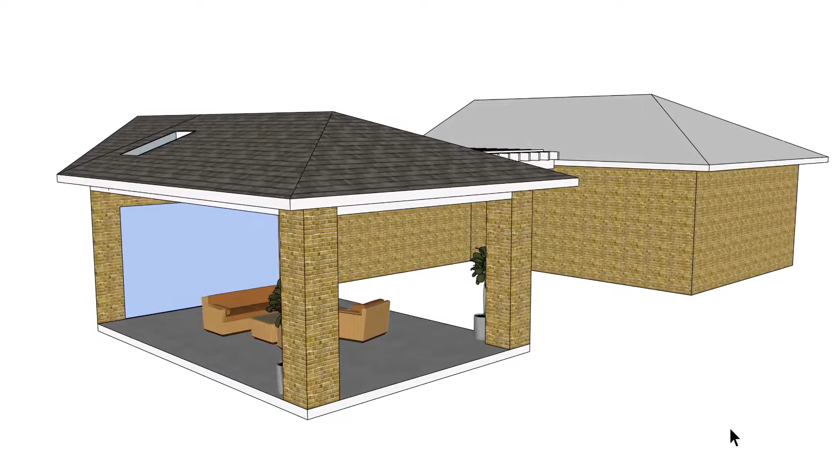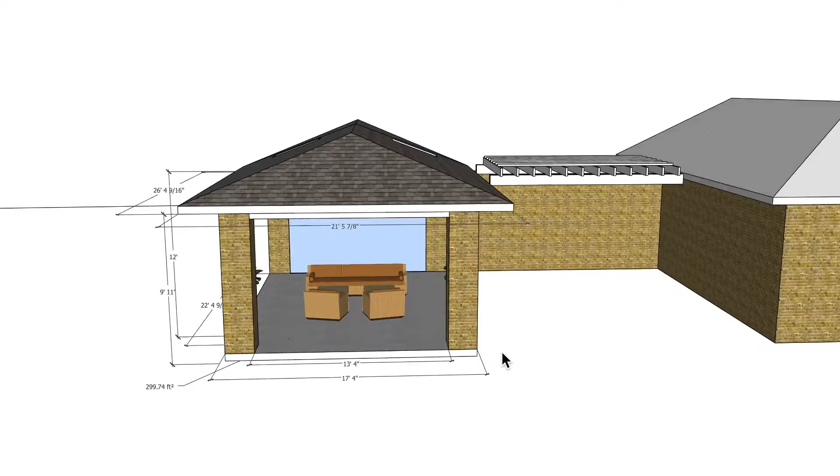Now let's get heating. Alright, so here we have this residential application, and let's just jump right into the dimensional part of the drawing here. So basically I have this, I'm going to call it a 13 by 22 and a half roughly, and you can see here there's a roofing section that goes a little bit wider than that, so that's 26 and a half roughly by about 22 and a half.

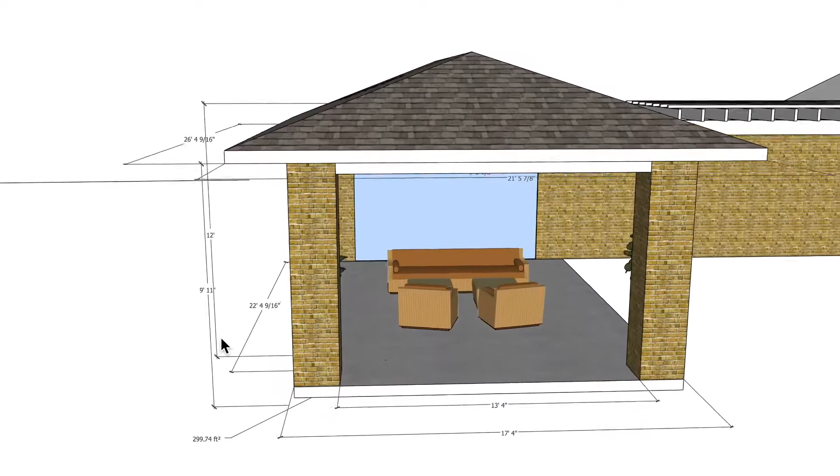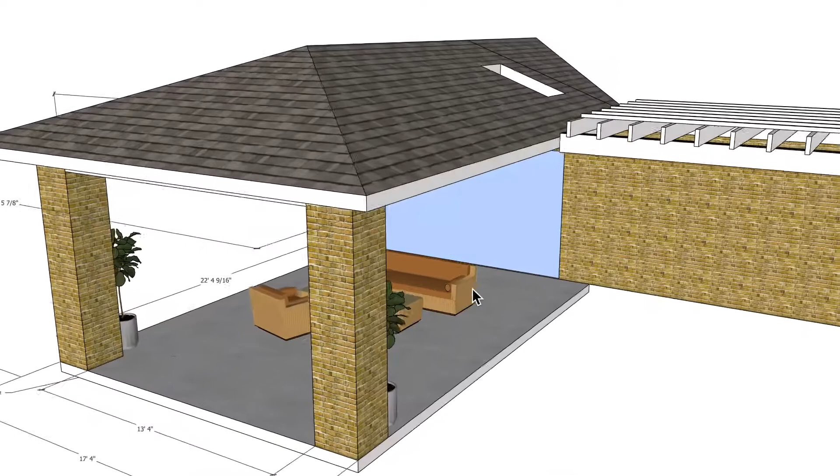And then also we have a couple different heights here. The eaves I have at 9 feet, and the ceiling height up here I have at 12 feet off the floor. And let's see if there's anything else that we need to talk about. I think that's about it. If I was to draw a square from this edge here all the way to this edge here, we'd come out with about 300 square feet of space, and it's a little bit larger with the overall space here, obviously. And so that's kind of like the calculation I would start out with.

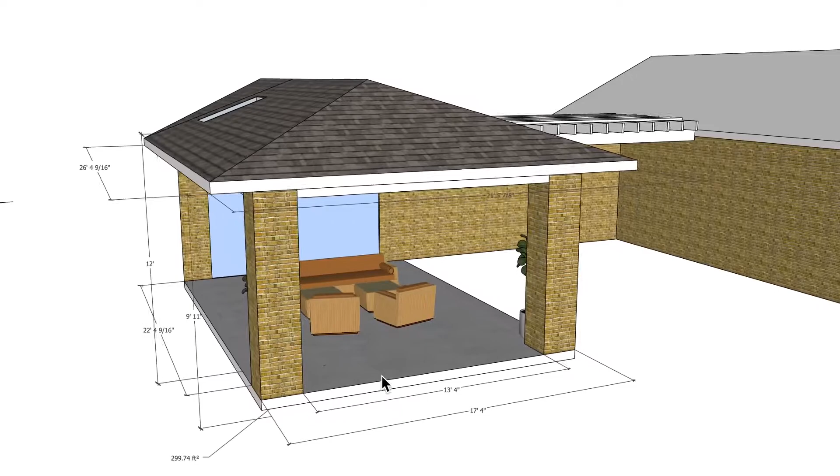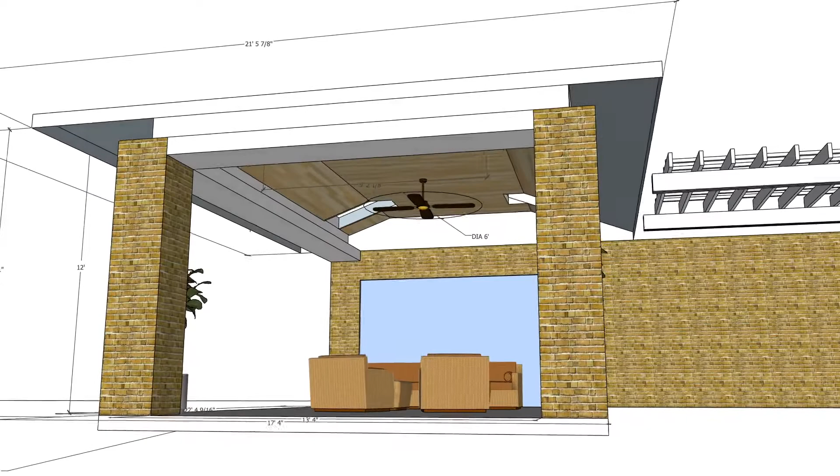And then also we have this 6-foot diameter fan. The round circle up here will represent the actual dimension of the 6-foot diameter. So we do have a fan in the center of the room, and I have it at roughly about 2 feet down from the ceiling. All right, let me turn that off again.

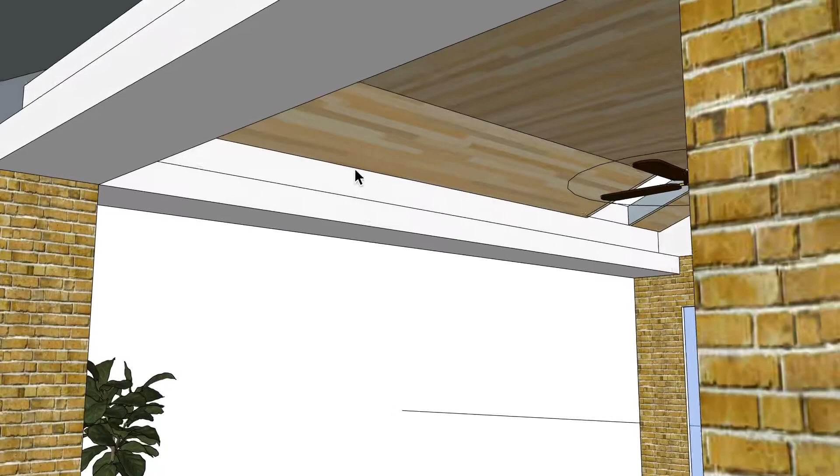Now, the original plan was to place the units within this area here and this area here and have them flush mounted. And because it's at an angle, that's not legal within the manufacturer's recommendations, so that won't be something that's doable. And it's not so much that you can't place the heater at the angle of this, it's just that you can't flush mount it.

And because of the flush mounting aspect of it, the ventilation will not allow the flush mount kit to properly ventilate, or I should say the configuration won't allow it to properly ventilate, and therefore it would tend to overheat within that type of application. So that's why it has to be placed on a flat ceiling surface in order to allow it to properly ventilate. All right, so we could put a couple of heaters there, however.

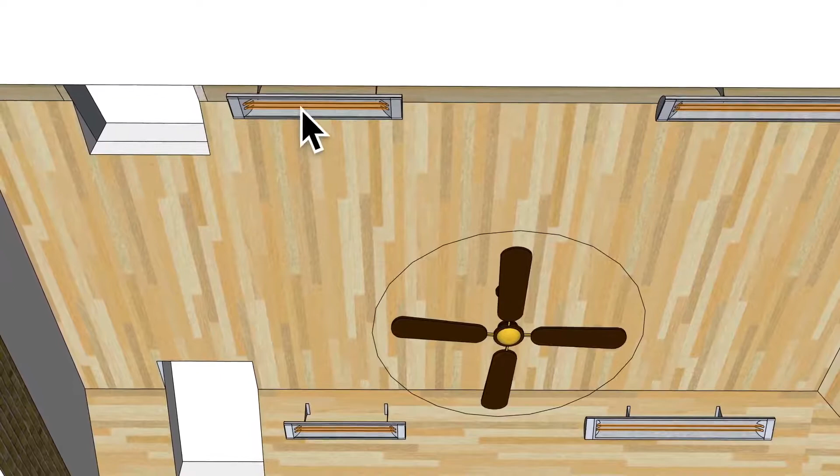And oops, sorry, I see I made a mistake here, but what I've done here is I've taken 2 of the 6,000 watt units, so I have one here and then one up here, and then 2 of the 4,000s, and you might want to even consider 5,000 watt units, just because I'm not seeing that the footprint of heat is powerful enough for this height. But in any case, so you could take 2 units here, 2 units there.

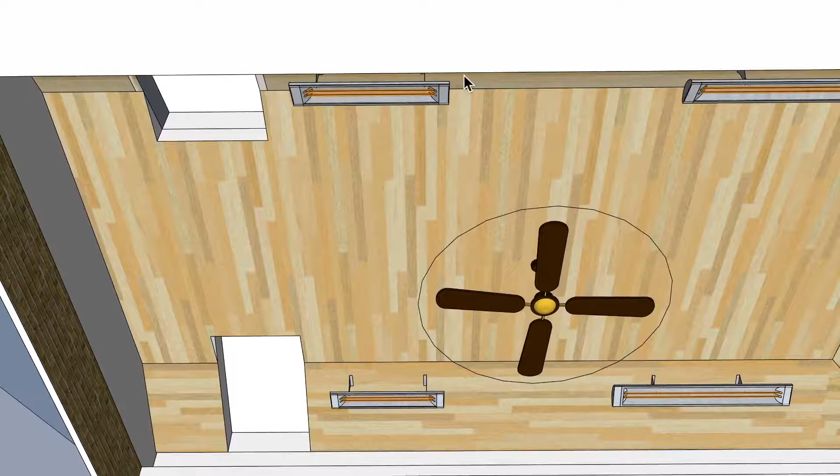Now I've used the shorter one because we do have skylights up here, and we also have to meet the clearances to combustibles. And let me just show you that. And so the clearances to combustibles, the one consideration I have is not only to the back edge of this area here, but also to the fan blades themselves. And you can see with this application here, you'd be meeting all that data there. Of course, I don't have this one set up right, so I apologize for that.

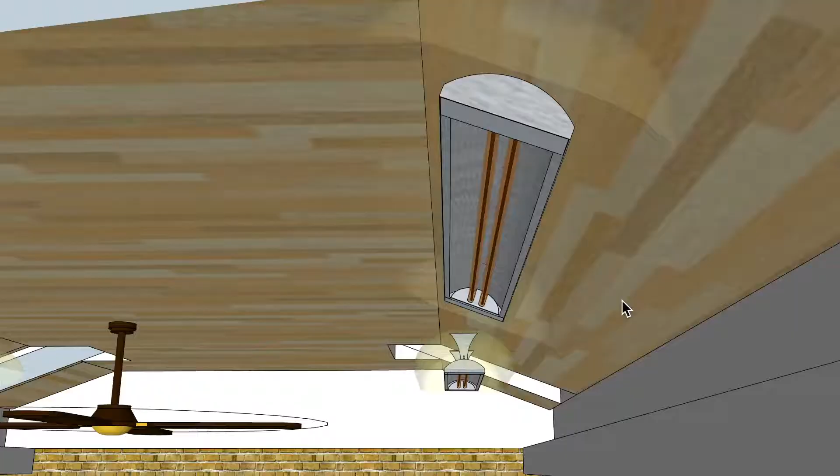All right, so let's go ahead and look at the footprint of heat. And well, let's go first of all back to the clearances above the heater. So with the OEM bracket attached to the ceiling like this, we would be meeting the clearances all above, and then of course below the soffit here as well. When it's at this angle, you can see if this one's pointed straight down, I'm not quite meeting that clearance, so it needs to be at the same angle of the ceiling that I have here, and that would work out just fine as far as the mounting of it goes.

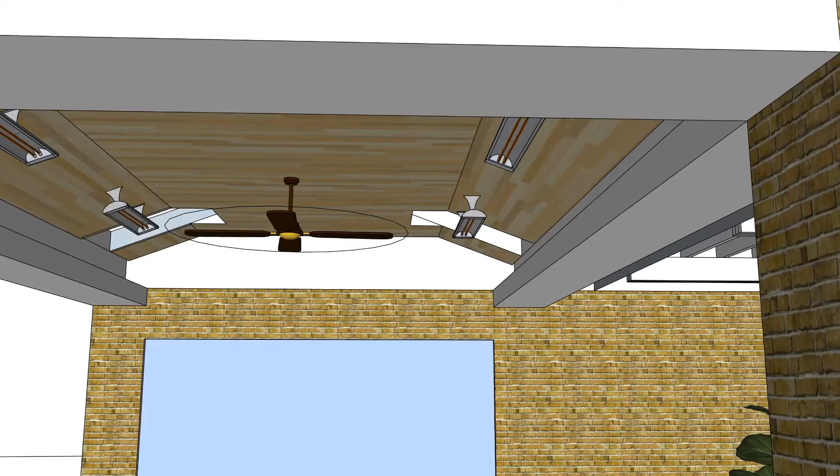And let's go ahead and look at the footprint of heat. So footprint of heat, you can see here that with the units angled in, we're getting pretty good coverage here. I would say that in a very cold climate like this, during the winter times, this would be a very well heated area in the center.

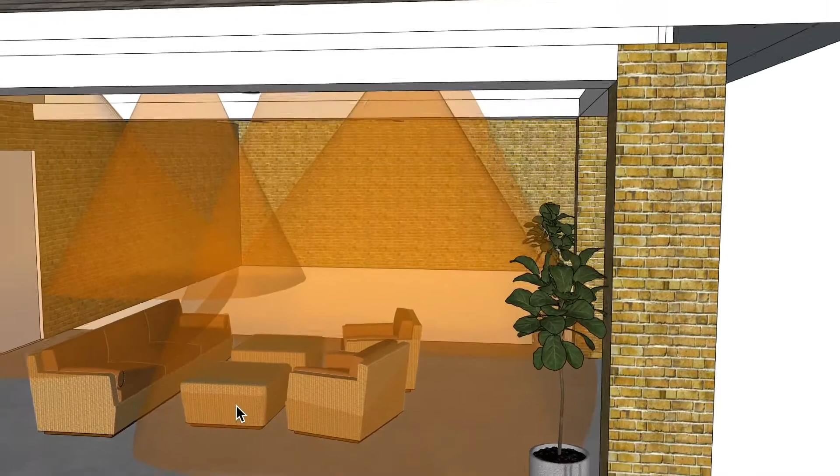Out here, you're not getting as much heat, but I'm really trying to concentrate the amount of heat into the center. I just think that with the fan here, that's probably how they might be, even a table, a dining table here, or something of that nature. But that would probably be how the setup would look.

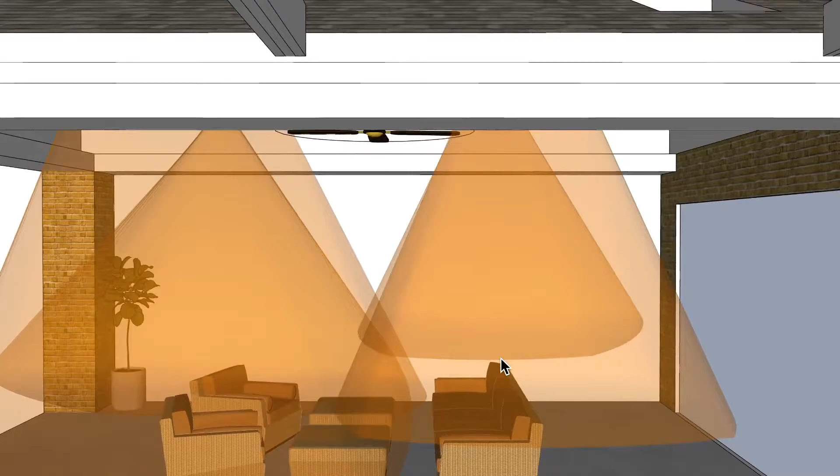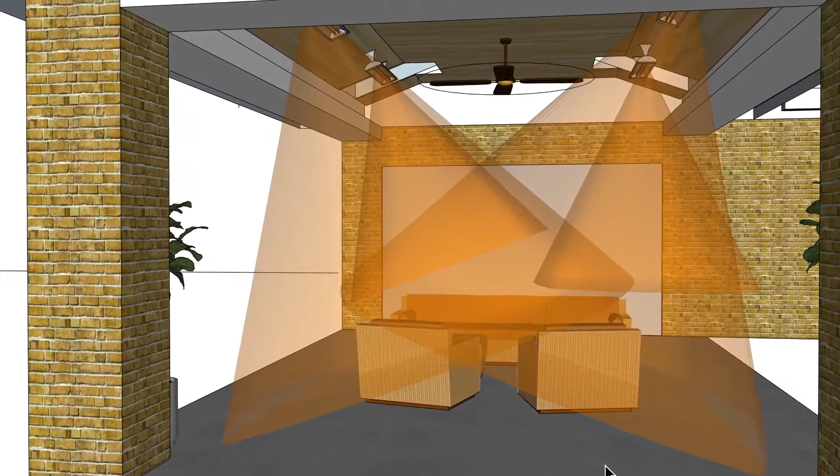Also, if these were 5,000 watt units, then the amount of heat that comes down here would be probably a foot lower than it is right now. So when I say heat, it's infrared heat, light waves. They're infrared light waves, so the light waves do travel and they penetrate all the way down until they absorb into any type of mass: the floors, tables, chairs, human body. So you do want a nice intense amount of that in order to feel comfortable. So that's why I'm choosing these models here.

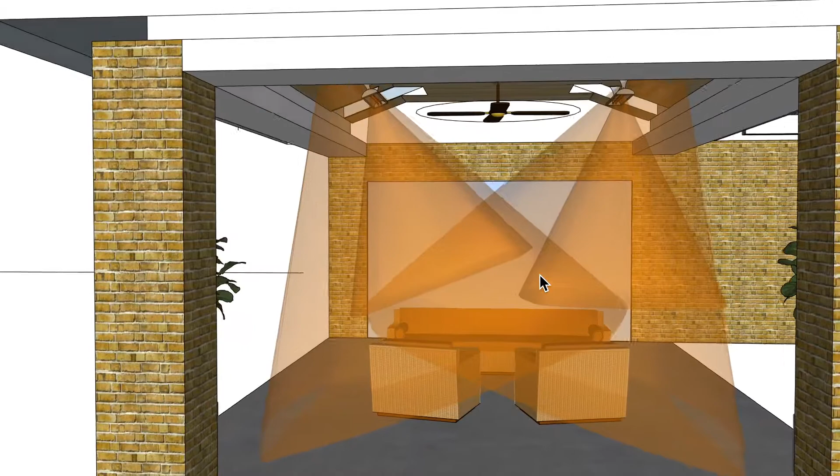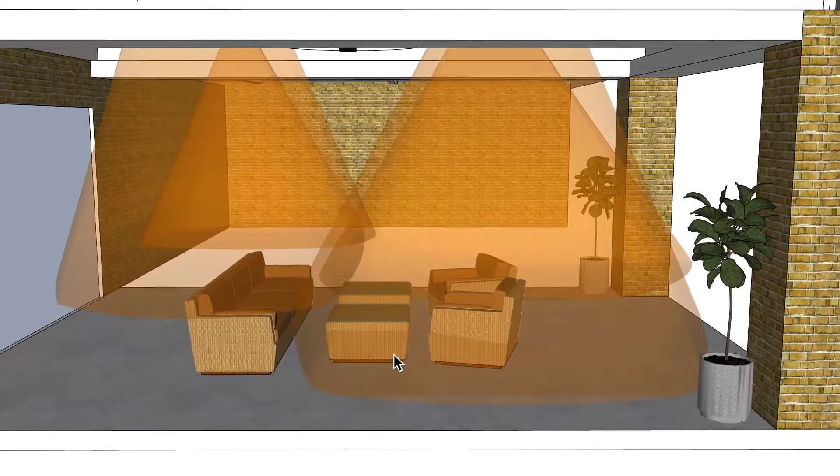Now, if you were to consider the amount of amperage you have available, and that does not meet the requirement that you're looking for, then you probably just want to do 2 of the 6,000 watt units, and then maneuver the seating appropriately throughout the season. Because this is a residential application, you obviously have that choice.

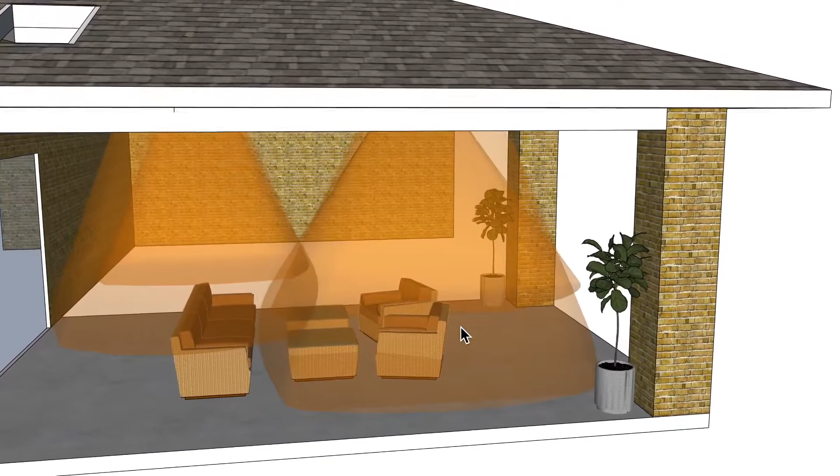If this was a commercial application and you had dining tables throughout a patio of a restaurant, let's say, then it's really hard to maneuver that stuff around. So for this application, you could do 2 of the 6,000 watt units and then just move the tables a little bit closer to each other. All right, so that would be one option there. And let's go ahead and turn that off right now, and we'll go with a different option.

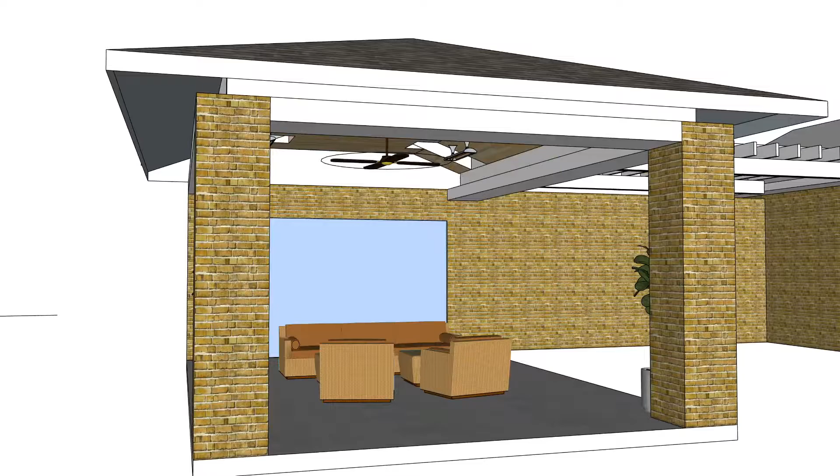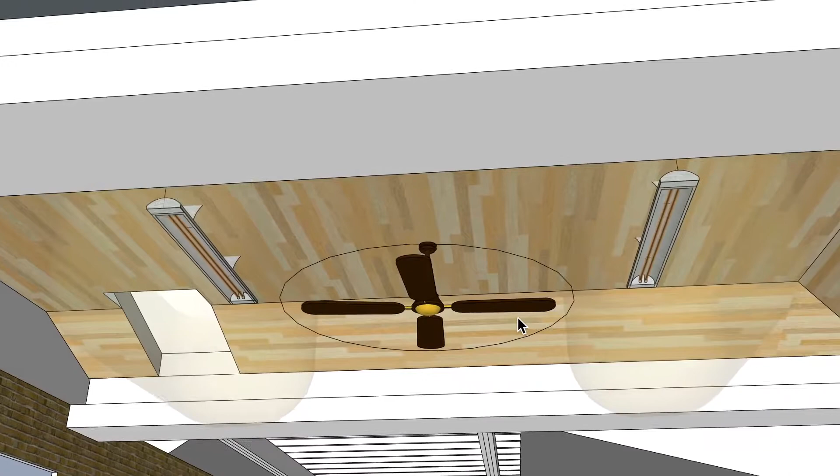This option here would be to surface mount, again, 2 of the 6,000 watt units. These are 6,000 watt, 240 volt, 25 amps a piece. And what I have here is I have them set up so that they are 18 inches from the edge of the fan. Now, I just went off the plan. The plan shows something that's roughly 6 feet in diameter, so it could be, let's say, 4 feet or maybe 5 feet in diameter, and so you would gain a few inches on either side, 6 and 6 if it's 5, and then of course 12 inches on each side if it was 4.

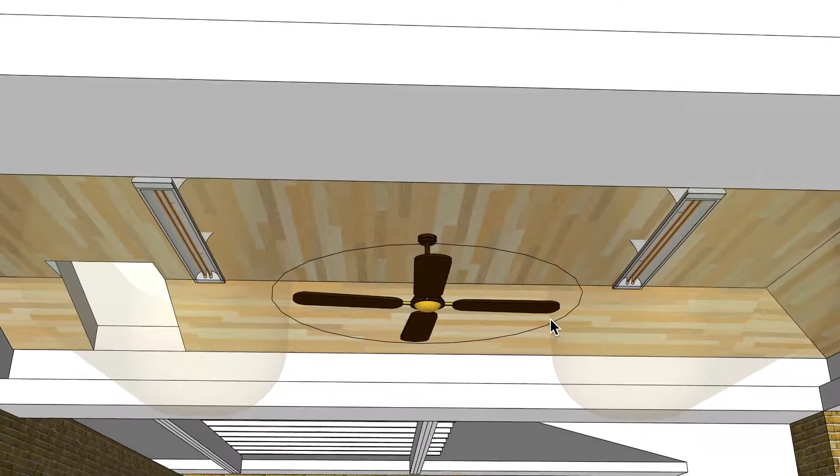So in any case, the clearances around the heater, you can see here there's no problem meeting that, and that's true with regards to the slope down here, which is what I'm really trying to show. So there's no problem with that. And I just have these heaters centered within this space. And just go ahead and look at the footprint of heat. So footprint of heat, again, 6,000 watts.

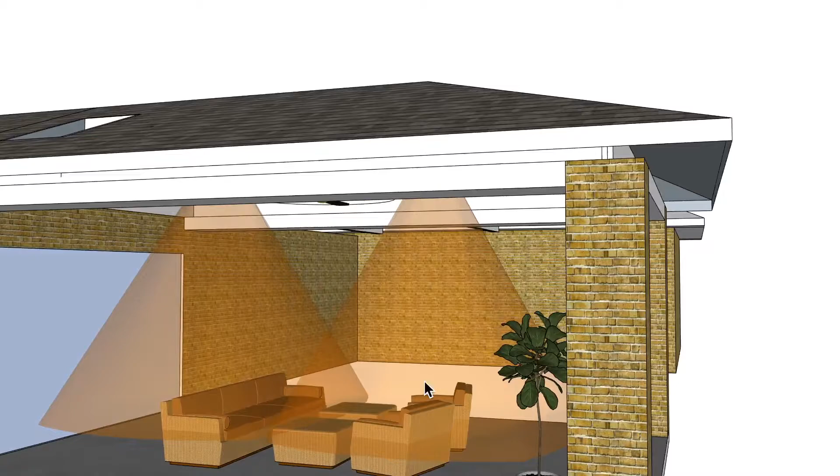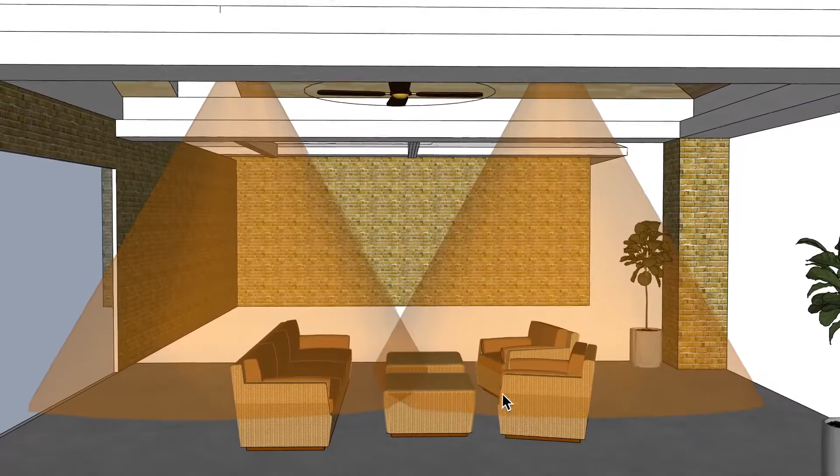Now, I know this particular consumer would like to have these flush mount, but because they're surface mount, they're about 9 inches lower. And I prefer that personally because I'm getting a little bit more intense heat down here, and especially because of the colder climate, I would probably prefer that. Now, visually speaking, the flush mount is going to give you just a little bit less intensity down here. So let me just go ahead and show that real quick here.

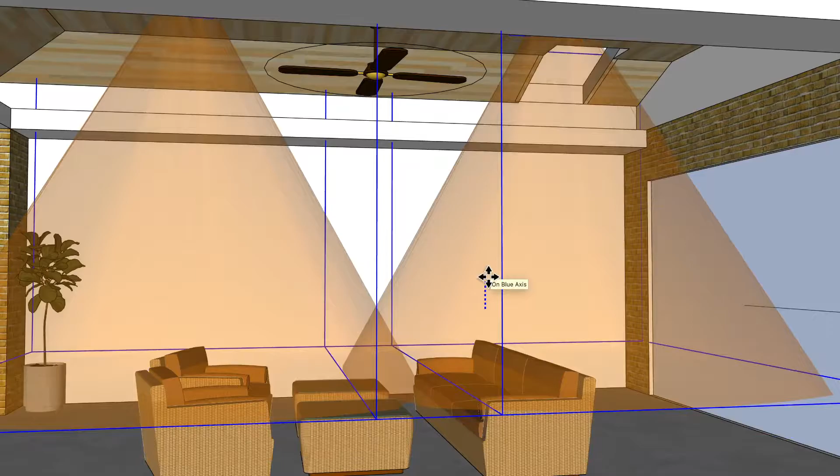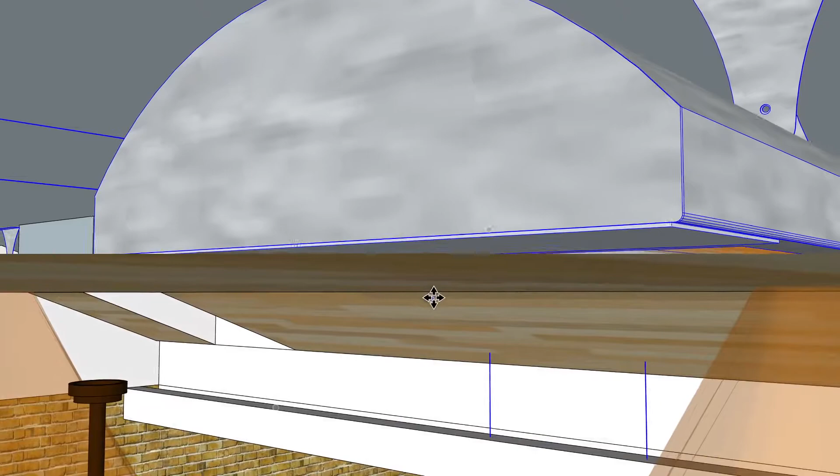I'm going to just go ahead and move these up 6 inches, or sorry, 9. It's actually 9.5 inches roughly. So let's go 9. So that would be close to, let's see if I'm there. Let's just do it right like this. Sorry for the delay. All right, so that would be the surface of the ceiling there.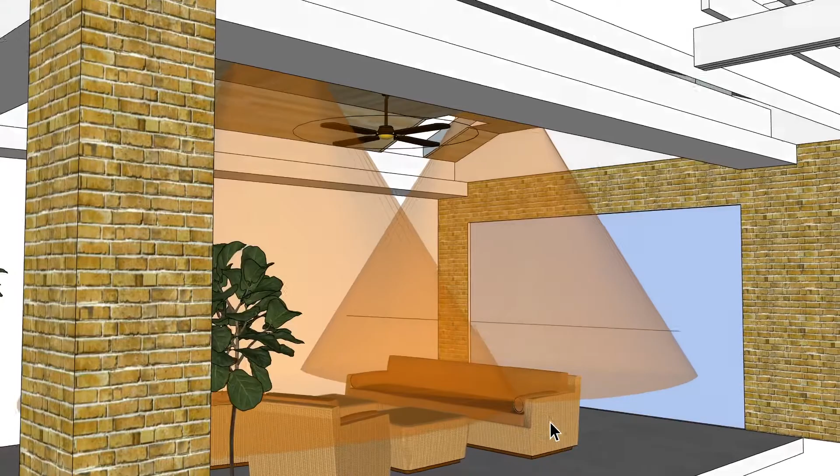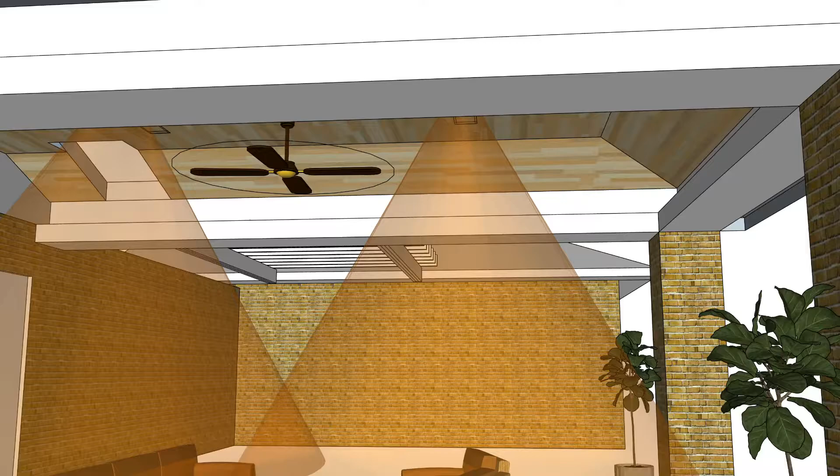And of course you have to use the flush mount kit and 1 hour fire rated drywall inside of that cavity. But you can see here now our intensity isn't quite as high as I'd like it to be, and so therefore I'm not excited about this, but it would work for some of the season. So something to consider. But it would also make the property look much better, so I do agree with that. And of course, you still need to meet that clearance on the 18-inch edge there.

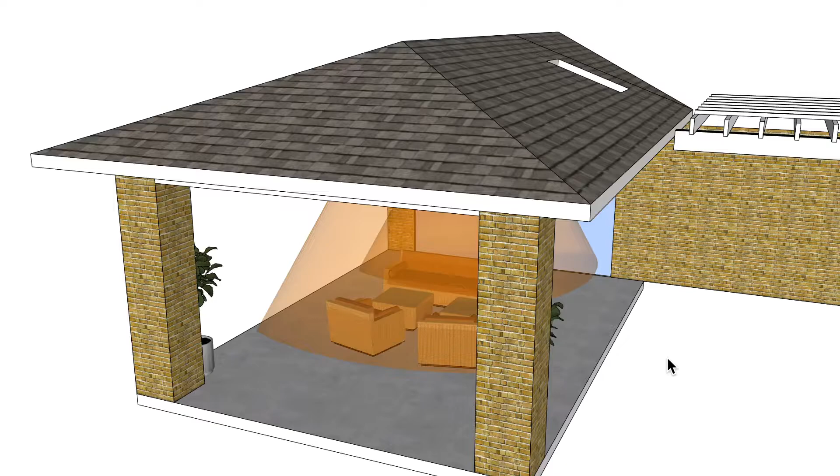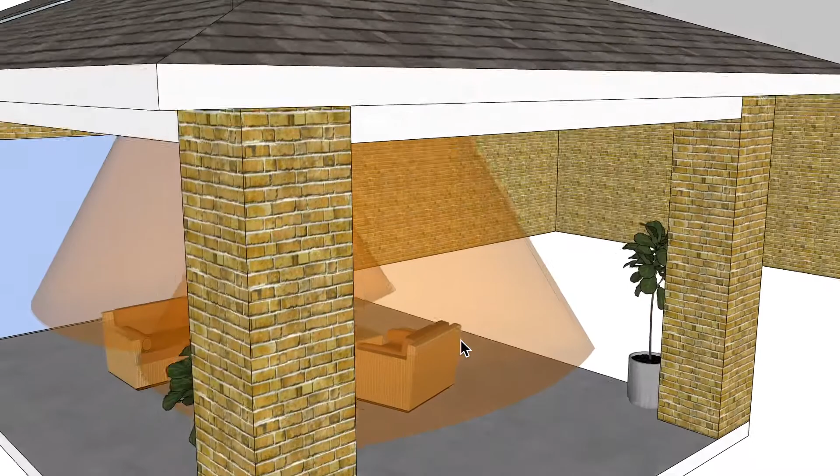So now going back to that, I think it was 300 square feet. So if I just took the 300 square feet and times it by, let's see here, 300 BTUs, so that's 90,000 BTUs, and I'll divide it by 20,600, which is roughly what the Infratech 6,000 watt unit is. That would call for 4.36 heaters. So just this inner edge here would call for 4 heaters to really properly heat it, and that's my concern there.